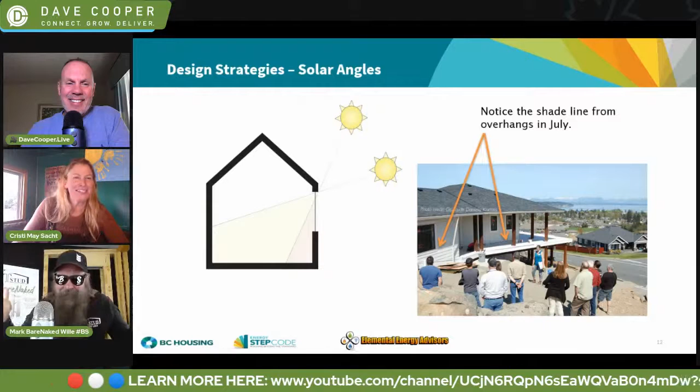That's a really bright idea, Cristi. Aw, so cute. Boom, boom. He even took his sunglasses off because they're so bright. Future's so bright for net zero houses in BC. I should be wearing shades. That's right. That's right.

And then in the winter time, it'll still come in because the sun's at a different angle, folks. Imagine that. Exactly. The sun is always looking out for us. It is, and if you want to get even more into it, you can look at planting deciduous trees where the leaves will fall off, and it gives you beautiful scenery, and the leaves shade your house. So there's always options. Nature is our friend.

Let me jump to an audience question that's pertinent to what you just said about that garage, and then I want to run through and say hi to some folks because we're running over here. So, Peter Molinar asks, are separate garage structures recommended? Yes. If you're going to attach a garage, you could attach it to the side, but trying to eliminate the bonuses over garages is really something that we're starting to see more and more as people are trying to get higher in the step code, because it's just another exposed floor, right? Just create a breezeway.

Or you can have it on the side as long as your air barrier has been built to encompass and engulf your heated house, and then your structures to the side. Detached is fine too. Having that building built against the side of it, as an energy advisor, what I do in my modeling is I say this exterior wall is attached to an unheated space, and it gives it a bit of a buffer on that wall, because now that wall might not be exposed to the outer elements all the time. So I would recommend either attach to the house, try to eliminate the bonuses over the garage, unless you want to do a workspace that's completely separate, a separate building envelope.

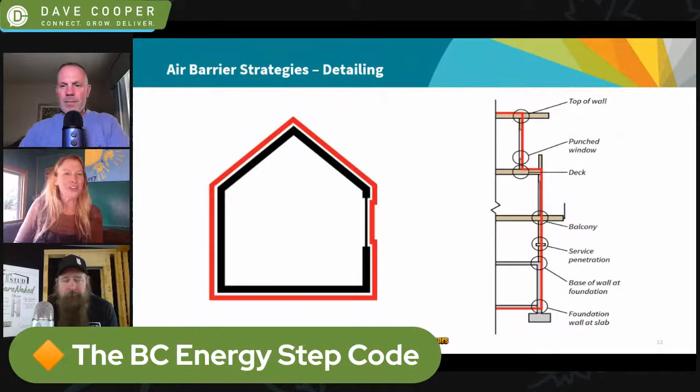And we need those architects and designers to say, hey, I know you love that bump out concept, but it's really going to be more complicated and hinder the project. Why don't we just bump it out another foot for the whole wall or two, or make sure we've got foundation below it, so it's not an exposed floor.

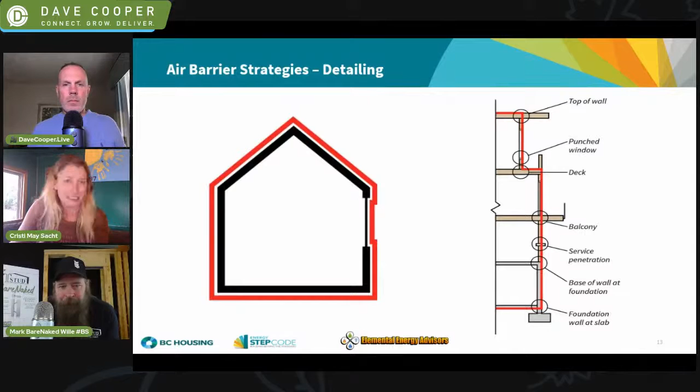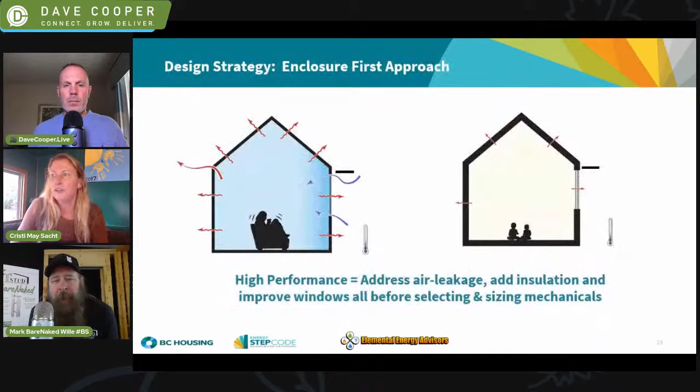So air barrier detailing, check it out. Tricky spots, decks. Let's get some strategies going. Let's get everybody on the build site that looks at those plans seeing that detailing of the air barrier. That balcony, can you back up that slide real quick? Yes, I can. That balcony looks like a thermal bridge, doesn't it? Oh, you betcha.

And so what's going on there, right? What's our strategy for that? How are we securing that? I say it all the time, if you've got anything punching out through, say a big timber or a big beam, guess what? It's no different than a fenestration. It's just like a window or door. What prep are you going to do on a window or door?

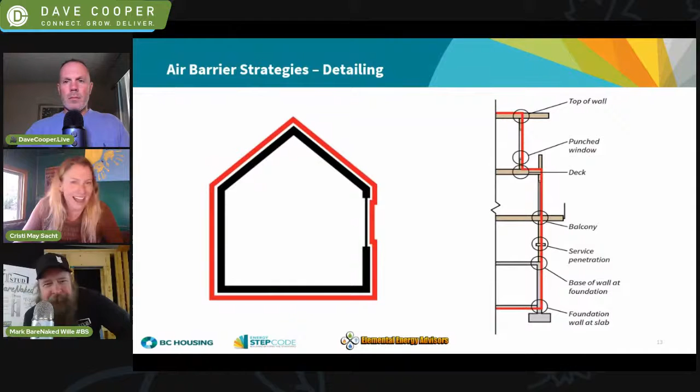Two lines of defense. So you're going to put, say, your Blueskin in there, and then I want to see two nice thick beads of caulking. So we have two lines of defense. When we sit that in there, we know that beam is now engulfed and sealed just like a window. But I don't see it in the industry, so again, learning, educating, and sharing this information. What is your plan? Exactly.

Okay, this is pretty self-explanatory. Building envelope first. Mark touched on that when I spoke about air tightness. That's partnered up with a heat recovery ventilator or energy recovery ventilator, 100%. And that also plays a major role in the mechanical energy use intensity.

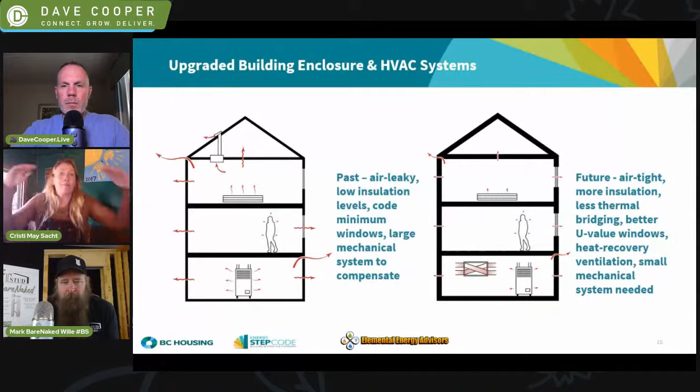Do you want to live in a house that has a bath fan running 24 hours a day in conjunction with your furnace air handler, which is a big fan? Or do you want to be running a little fan for your HRV and just let it purr? And that actually recovers heat. So not only does it save energy over that bath fan and the big air handler, but it enables us to tighten up our building envelope and remove that humidity and moisture if it's present.

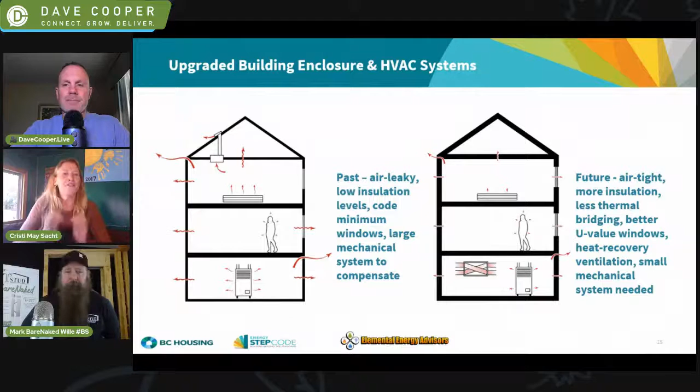I have seen water dripping down walls and it makes me want to cry. So ventilate, ventilate, ventilate. Then you can go as airtight as you want when you've got the proper mechanicals. Air barrier is a system. Here's the one: are you using products recommended by the manufacturer to be used together? When you apply a tape, can you peel the tape off? If you can, it is not molecularly binding to the surface you have adhered it to.

So one of the major things I'm constantly trying to impress upon my builders and crews: get an air boss. Have somebody on your job site all the time that's aware of the air changes, that doesn't just let the drywallers hack out their pot lights and cut all the poly. Dave is an air boss, Cristi. He took the training.

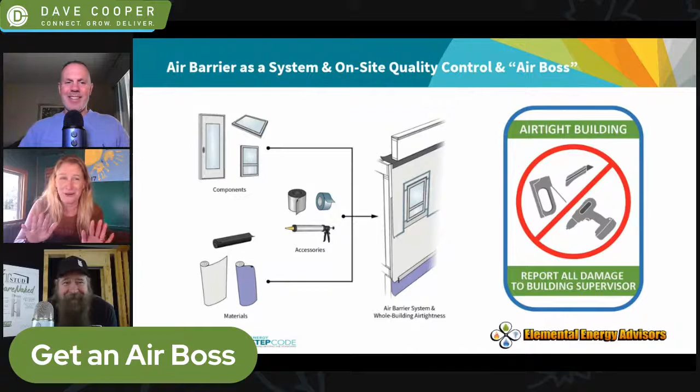He knows you have to roll that tape, and roll that tape. Exactly. And are you using the right tape? Because I'm going to be honest, I see red Tuck Tape used on exterior sheathing membranes. And if you're doing that and I drive by, I'm going to take a photo and I'm going to share it on What Not to Do. So here's your little warning, because you know what? Tuck Tape is not even rated to be used on exterior product or exterior at all.

Is there a website you're saying? It's called What Not to Do? Yeah, unfortunately I don't have a website on What Not to Do. Oh, Dave, we're gonna have a website for Cristi. Yeah, I definitely would need help with that. I'm more of the hands-on, not really the computer techie, but if anyone listening out there wants to help create a What Not to Do website, now you know Cristi, and show us your gifts. I know it's true.

I have a long list, like 13 years watching buildings evolve, just the concept of, are you using the proper products? Question for all you builders and tradespeople out there. How many of you have tested the products that you're about to use? I encourage my guys to get a piece of wood, put your caulking on it, try to peel it off. If it peels off, it's not effective. Test it, put it to the test. I know the salespeople say everything's amazing, but put it to the test.

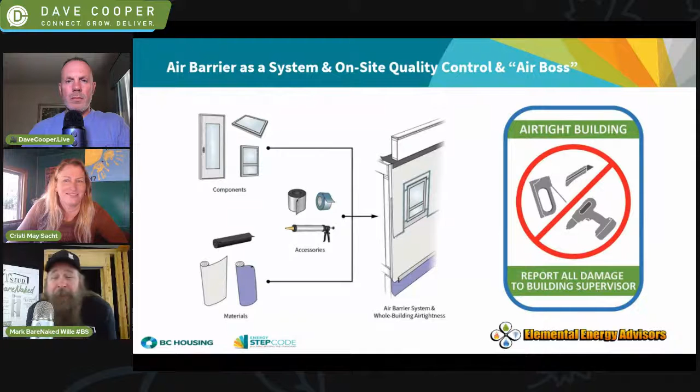And what are you adhering to? Are you adhering to concrete? Are you adhering to wood? Are you adhering to exterior sheathing membrane? Are you adhering to poly? What are you adhering to, and does it actually stick? Is it effective, right? My favorite question is when you ask the manufacturer, what does this work on? And their answer is, oh, it works on everything. They lie. That's like hiring a contractor and saying, what is your specialty? And they say, I can do everything. Yeah. Way to go. Great point, Cristi.

Well, we don't know what we don't know. And because we've used the same products for so many years and we were told to use these products, a lot of people are trusting, and they trust that this is the product to use. And so that's where I just try to say, put it to the test. This is your house that you're building. This is the legacy you're leaving. Do you want to walk away and have the spray foam that you put around your fenestrations, that you should never do, because spray foam dries and cracks?

The best part about it is they tend to use open cell. So then as soon as we get a rain, because we live on the wet coast out here, all of a sudden around the doors there's these fibers, it's deteriorating. So there's no continuity in that air barrier. So check your products, test your products, make sure it's being used in the right place.

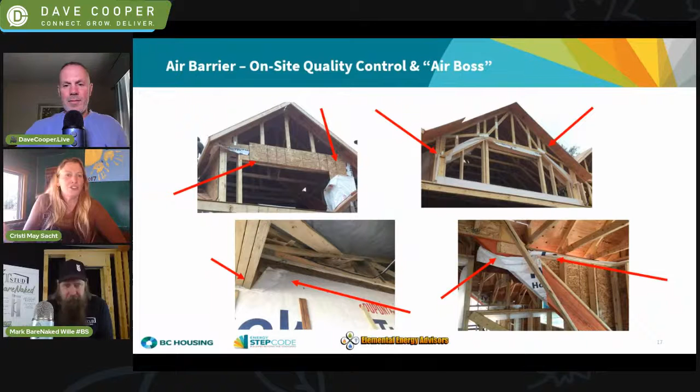So then we can prevent this, because then the builder can walk on site, or the air boss is there, and they're like, buddy, we've got this detail here. Why did you miss it? If we don't communicate and educate, then how do they know? They're just going to keep doing what they've always done. So again, watching those details, watching those transitions. Apparently I got a blank one.

I love it. I love it. I see Sean in the background giving a thumbs up. He's still with us. Should we bring him in? Yeah. I didn't know he was here. Thank you, Sean. Yeah, he's still there. You should have seen, I was watching him a few seconds ago doing a selfie video. Oh, nice. I think he forgot I was here. I love it. What's up, guys? It's great stuff.

It's not enough time to go over everything for the BC Energy Step Code, but I hope that I at least gave everybody a bit of an overview and a path to the resources, so that maybe we can all get on the same page. How amazing would that be, that eventually we could say that both Canada and the United States are on a path to net zero? I love it. I love it. Hey, let's throw a few more comments up there, because we got some really great things happening.